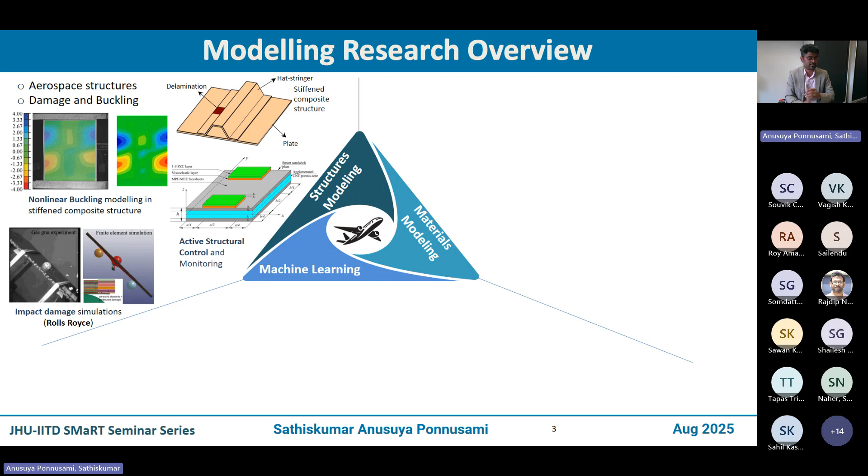With that, a quick overview of what we do. For the last almost 7 years I've been an academic, and my research is primarily centered around modeling tools for aerospace structures and materials problems. There are three different pillars in this. In the first pillar, we primarily develop nonlinear modeling techniques to capture some highly intricate nonlinear mechanisms such as damage and buckling and their interactions in aerospace composite structures. We also develop techniques to control structures, either for morphing or for controlling vibrations using smart materials embedded into the structure, and high fidelity tools to capture impact-induced damage in aerospace composite structures, primarily in collaboration with Rolls-Royce.

Moving on to the second pillar, it's all about modeling materials in the context of multiphysics and multiscale. Here we develop comprehensive modeling tools for novel material systems, for example self-healing materials, but also other classes such as multifunctional composites for electromagnetics or stealth, and in collaboration with Airbus, a range of material systems that incorporate multifunctionality such as harvesting and storing energy on top of being the primary load bearer in an aircraft structure.

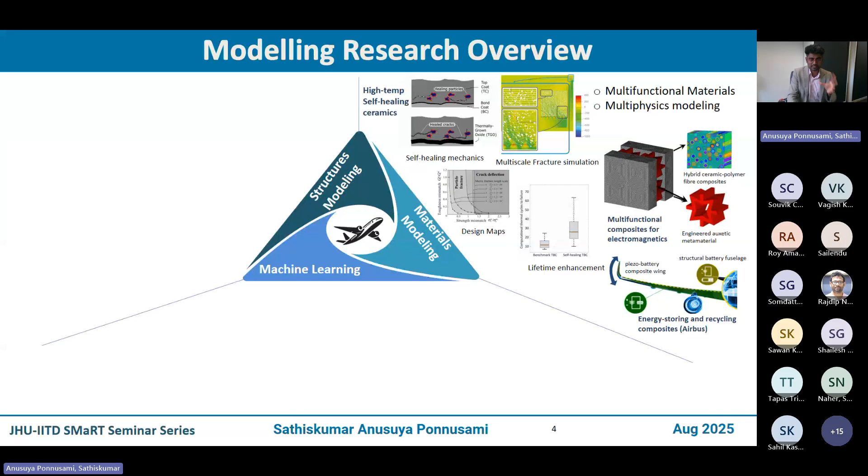Now the third, cross-cutting pillar is probably the most relevant for today's talk: machine learning. It's a cross-cutting pillar, and within it we primarily work on two different directions.

The first being utilizing machine learning architectures for constitutive modeling across a range of material systems, but also utilizing generative deep learning for design of engineering systems, both materials, but also more complex engineering systems.

So what you see here is some examples, an end-to-end pipeline that actually takes in microstructure as input and provides the range of material properties of interest for design from a materials context.

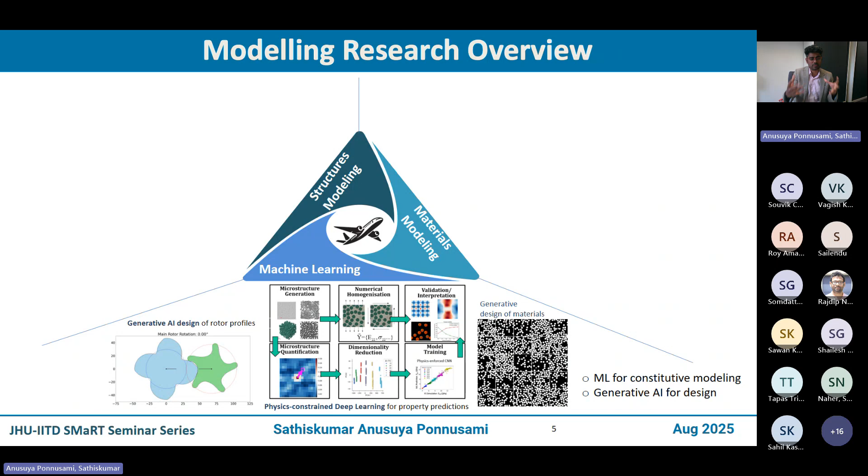We also extensively use generative deep learning, primarily GANs and diffusion models, to come up with novel designs of rotor profiles and material systems. So that pretty much summarizes the landscape of my research team over the last 7 years.

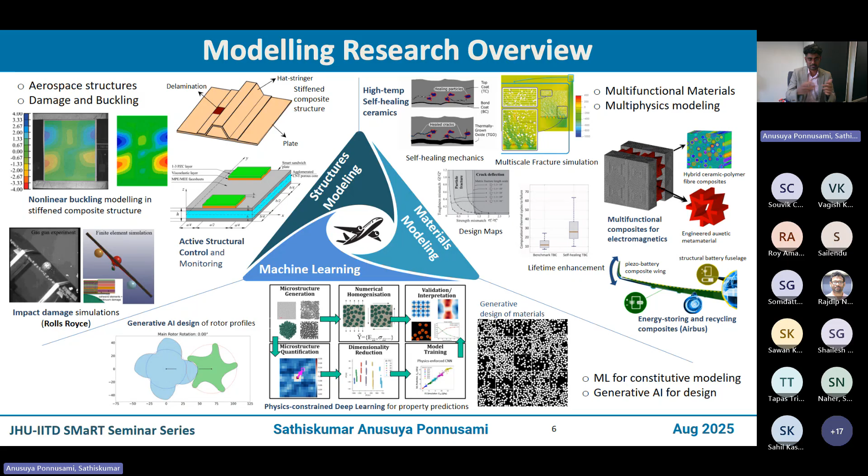And this work is done not by me, but by my students, my postdocs, but also my collaborators across the world. So with that acknowledgement, let me quickly focus on the third pillar, which is machine learning for prediction and design.

Within that, the first direction is predictive machine learning, in which what you saw in the previous slide is an end-to-end pipeline that can handle arbitrary microstructures to provide a range of material properties, multiphysics material properties of interest.

And these are some of the results, which is also a key part of today's talk.

But also along the second direction within this pillar is how can we use generative deep learning? I'm not talking about large language models here, but more of designing based on vectorized images and time series based image evolution. That is what I talk about here.

And one example is what you see here is the training process of a Bayesian generative adversarial network, which can come up with or generate realistic rotor profiles for compressor systems.

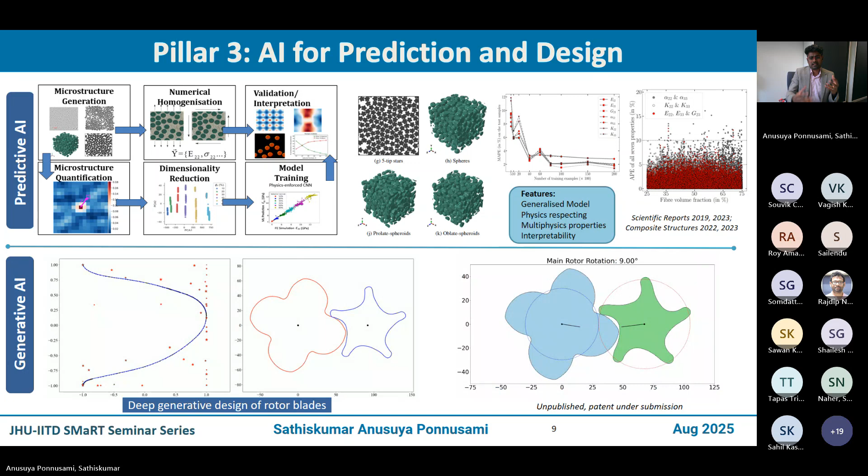This is an industrial consortium funded project here. So what we really achieved here is a valid, manufacturable rotor profile that is not designable using existing classes of techniques.

In other words, a lot of hybridization has gone into it. And as a result, we were able to observe certain profile designs which performed better than the existing benchmarks.

So you may call that hallucination, but you may also put it in a different context: can you hybridize different classes of existing designs to come up with a novel design, which is not otherwise possible using existing techniques?

So the second phase of the project is being funded now, and it's going to start in a few days in September.

But I've been working on this particular broad range of topics for a range of material systems for over 6 years. My fundamental questions are these.

Where does machine learning add value? I think that is really, really important.

And then once we identify that, how do we design the problem and how do we choose the surrogate? Surrogate is a very critical word here, and its meaning should be properly understood.

And the fourth question is, what is really the way forward to integrate machine learning into mechanics problems, whether it is modeling, simulation, or prediction? How are we going to integrate machine learning architectures towards mechanics problems?

I think if one is able to answer comfortably and convincingly all these questions, then it would mean he or she has a nice problem to handle using machine learning.

So with that, what I'm going to do for the next 40 minutes or so is briefly touch upon 4 different problems which we have worked on for the last 4 or 5 years. And in the end, I'd like to critique which problem is more useful than the other.

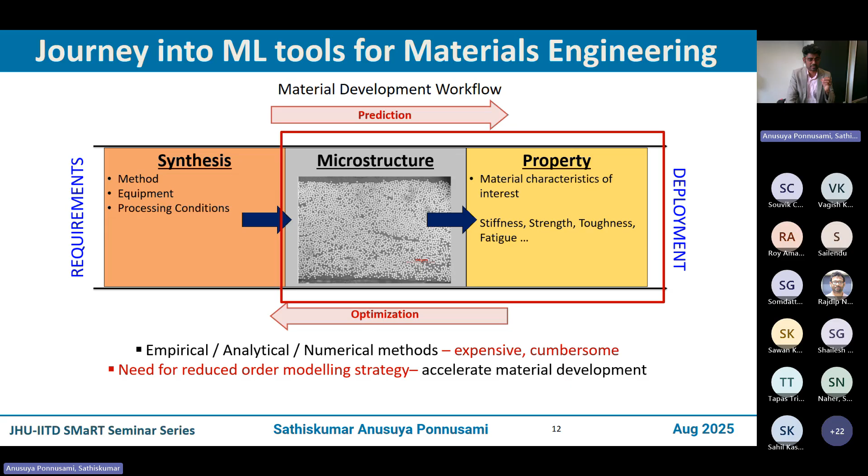So that is the single line objective of this particular piece of work, in which the overall methodology is what you see here. There is a typical workflow that you will find in any materials prediction framework using machine learning. You have certain microstructures of materials, and then you obtain the properties of the microstructures. There are two different ways to go about it. One is conduct experiments, get the properties, or conduct numerical experiments, get the properties. And that is the most time-consuming aspect of generating the data set.

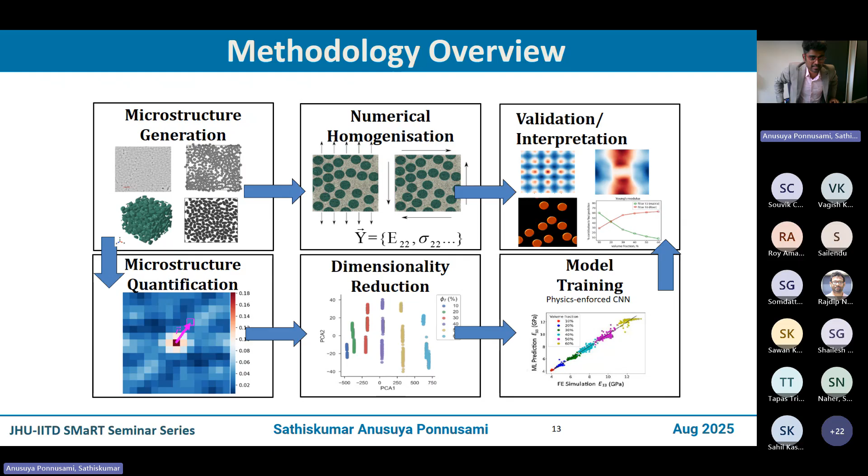But even then, can you still make a machine learning model that is still useful, despite all the computational costs associated with the data generation? And if you are able to say yes, then that's a success. And of course, there are other aspects that you have, in terms of if you do not use deep learning techniques, you may have to do quantifying the microstructure, do some dimensionality reduction, and then develop or train machine learning models to predict, followed by some sort of validation and interpretation of your models or the prediction from your models.

Okay, so this slide is quite important here, which answers some of the questions that I raised before. And the title clearly says, how do we move towards a more generalized, physics-respecting machine learning model? To put it simply, the objective is simple. You are given any arbitrary microstructure of a composite material.

I'm not saying that here you're feeding in a microstructure of a carbon fiber composite. No, you are given any microstructure of any composite. For example, it can be glass fiber reinforced in epoxy matrix, or it can be a carbon fiber, or any other possible fiber matrix combination. You feed it into the pre-trained model, it gives you the properties. And here by properties, I mean not just the mechanical properties, but a bit more, which you will see later.

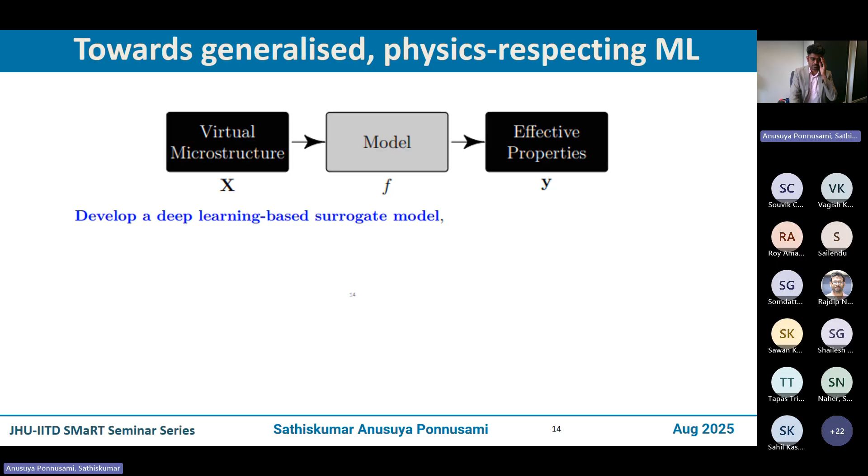So some of the ingredients of the model that we developed are shown here. First one is it considers end-to-end practical range of fiber volume fractions, meaning the amount of fibers that you have in the system, and the different combinations of fiber matrix material systems. And that's quite key towards achieving a generalized model here. And it obviously accounts for arbitrary fiber shapes and distributions, which is quite important to enable the design exploration of this particular space.

You don't just predict the Young's modulus or Poisson's ratio. You predict a whole range of properties of interest, starting from Young's modulus, but also yield strength, thermal expansion coefficient, and thermal conductivity. This is because in demanding applications like aerospace structures, you often do not just need one effective property such as strength or stiffness—you need a whole lot of properties.

In some cases the material might be smarter, so you may look into piezoelectric properties, or stealth properties related to electromagnetic absorption. In that sense, you need the prediction space to be as wide as possible in terms of the properties of interest, and that is something we accounted for in this framework.

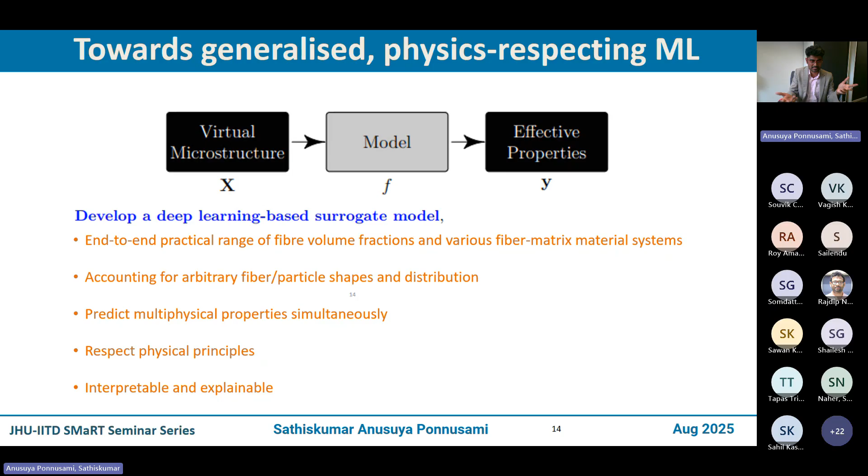The following question is addressed: we are generating microstructures virtually, but does it correlate with reality? That validation is done using spatial metrics of these microstructures.

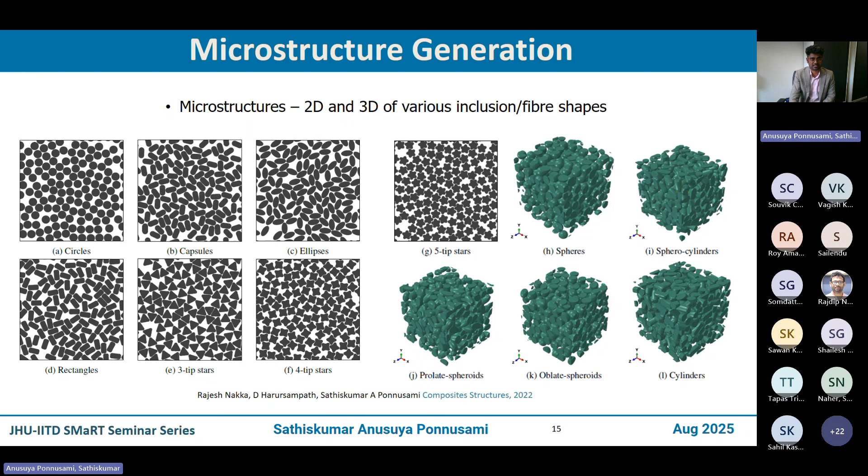Then comes the properties of interest and how we design the dataset. This is a critical step before getting into complex machine learning architectures. What's really important is how you define the data, how you design your experiments—virtual experiments in this case. That's the snapshot of this particular slide.

We identified the practical range of properties and the input parameters in terms of the volume fraction and the fiber-matrix combinations. That's what I mean.

For example, let me open the pointer options. If you look into this number here, the ratio of the fiber modulus to the matrix modulus, it goes from 2 to 200. That basically covers the entire practical range one would want to design. So that's what I mean—you make your design space as large as possible.

That doesn't mean you're cranking up the machine and generating millions of datasets—no, that's not the point. The point is you have a wide design space but still sample effectively, so that you cover the range and choose a model such that it can interpolate well and also extrapolate to a reasonable extent outside the design space or the data space.

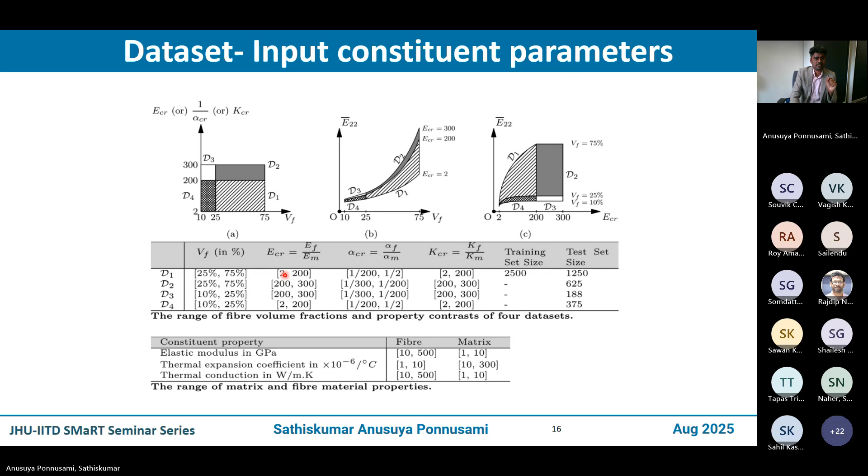These are some of the properties obtained using the so-called variational asymptotic homogenization, which many of you might not be aware of. To put it simply, what we do is create RVEs—representative volume elements—of arbitrary microstructures. Using this technique, combining variational and asymptotic principles, we pose a variational statement of this RVE. Then, by minimizing the strain energy density of this problem in terms of the small parameters that exist, we arrive at the Euler-Lagrange equation. From there, you can get the effective homogenized strain energy, which results in the bunch of properties of your interest—the homogeneous properties.

I'm aware I'm going faster in explaining this particular tool, but the reason is this tool is already established—we've published papers you can refer to. It's called variational asymptotic homogenization, originally developed by Professor Dewey Hodges and Professor Wenbin Yu from Georgia Tech, and also from our group at IISc, led by Professor Harursampath.

So this is how the dataset looks like—the Young's modulus, the thermal expansion coefficient, and the thermal conductivity.

But also what is not shown here is other sets of properties, such as yield strength, and also electromagnetic or piezoelectric properties. All that data is available, but it's not shown here for brevity.

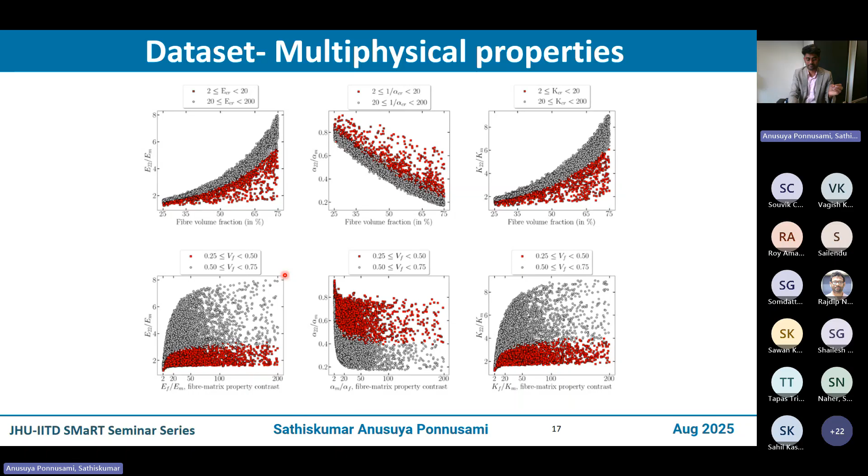Great. The next key thing we do, which is a very simple step but quite useful, is you need to make your machine learning model as objective as possible. In other words, if you show your model a given microstructure, however you rotate or flip it, it's still the same, right?

So this is one way of augmenting the data, but also making the model more objective for these rotations or reflections. The next key step is, as I said, we have about 18,000 microstructures, not millions, but still we were able to populate the entire design space, covering arbitrary combinations of fiber matrices and arbitrary multiphysical properties. Some of them are shown here.

So what we do as a key step is, in the microstructure, which is binary, a two-phase microstructure, you embed the material information, or encode the material information as arrays. So that during the training, these arrays are passed in as input properties.

So once you know the properties of the individual phases, you basically have different layers in your microstructures. One is the microstructure image, but then there are multiple other layers behind, which are the material properties encoded in arrays. That is what you basically see here.

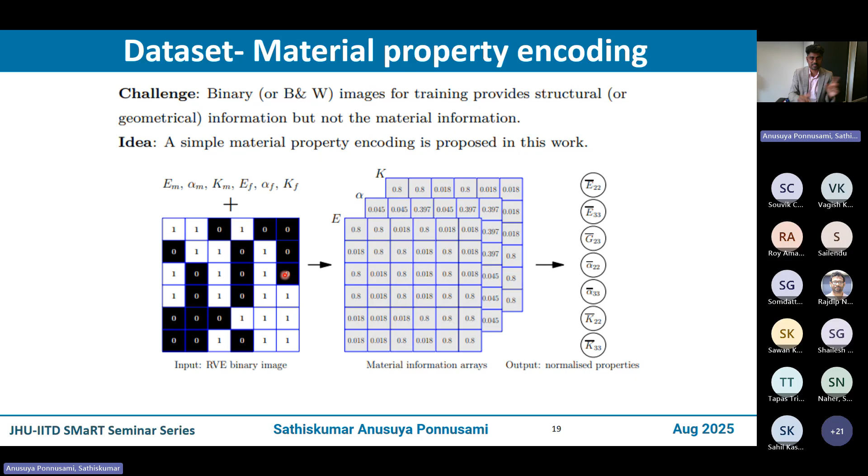So with that, now what we have is material encoded microstructure and the resulting effective properties obtained in a computationally efficient manner using the technique I described before. Now we go on, the data set is ready.

Now we go into CNN. In this part, one can think of a whole lot of architectures, but the objective here is we choose one of the most popular CNN architectures, inspired from VGGNet type architectures, quite popular in computer vision applications. So we used that and adapted it to our problem here.

One may argue other classes of architectures can also be quite useful here. For example, one of our organizers is quite active in working on neural operators. In fact, we have a project going on utilizing neural operators for these kinds of problems. But the point here is not really to justify a particular type of architecture, but to show how the entire pipeline should be constructed such that you achieve the goal of having a more generalized model to predict a wide range of properties of interest.

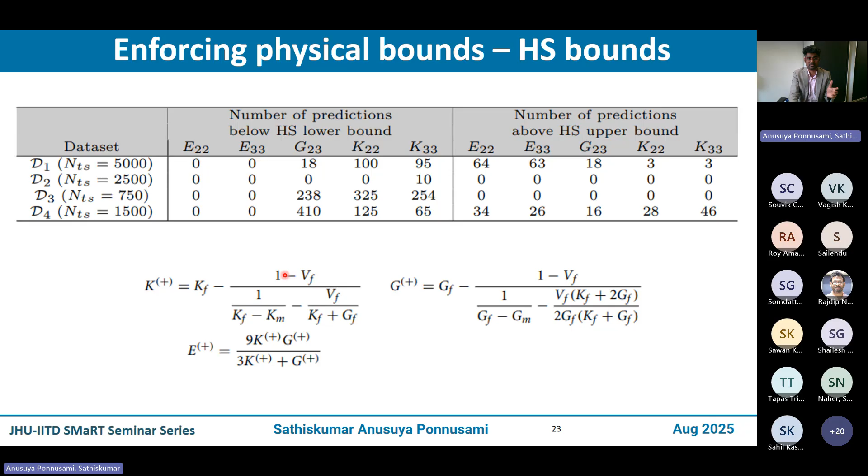Once you have some sort of physics that is infused, which is quite important in homogenization, these bounds should be met strictly. Some of the results are what you see here in terms of the error metric, absolute percentage error of different properties. Without getting into the details, what you really see here is for the vast majority of the samples, the error is within 5 to 7%.

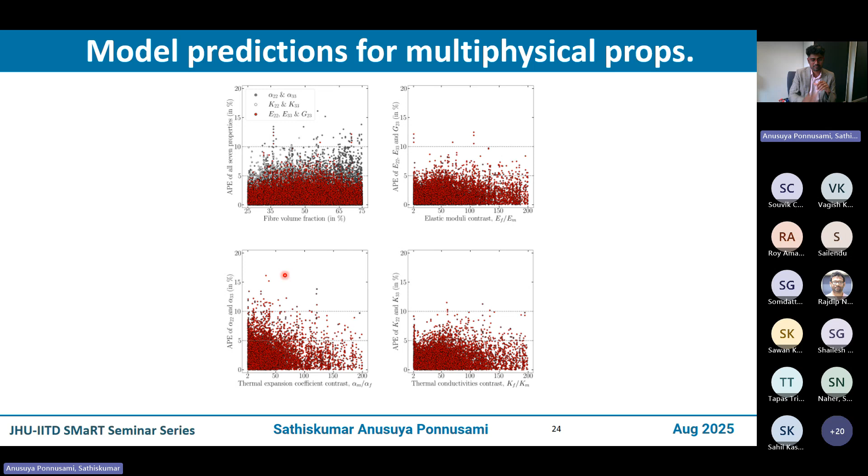What is really important is this error—even if you go to the highest error of about 10%—has to be understood in the context of the generality that the model provides. The model is not for one particular fiber matrix combination. It is for an arbitrary fiber matrix combination and for arbitrary material properties, and that is quite important here. So that is what you see in terms of the results.

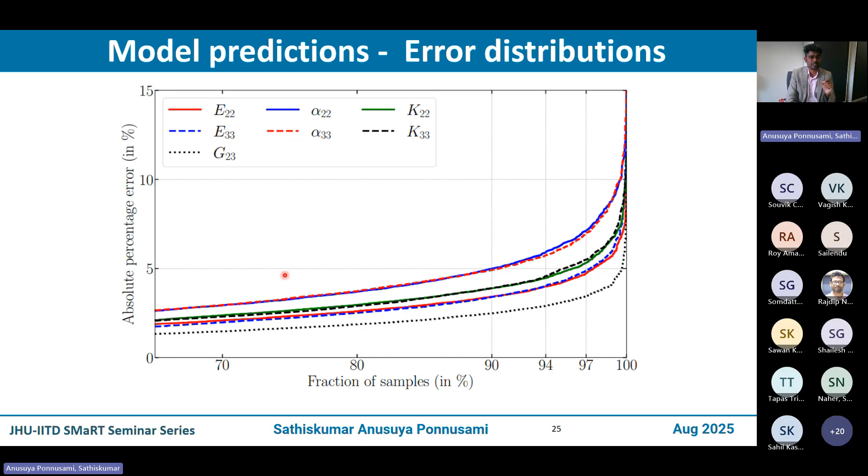Now, obviously, we have a design space for the dataset generation. But what if you extrapolate or force the model to predict out of the bounds? We have three different datasets, D2, D3, and D4, which are in widely extrapolated domains, not physically needed for practical purposes because engineering design doesn't go into that space. Nonetheless, we want to check how well the model can extrapolate. The disclaimer is we are not extrapolating significantly out of the domain, but we still go reasonably enough out of the design bounds for the data.

What we really observed is, again, more than 90% of the samples in the extrapolated regions still provided a reasonable prediction for the properties, for all sorts of properties you can think of, both mechanical and thermomechanical. Which is good news, because the model is now not only generalized for arbitrary material properties and combinations, but also can extrapolate well in the neighbor domains outside its training space.

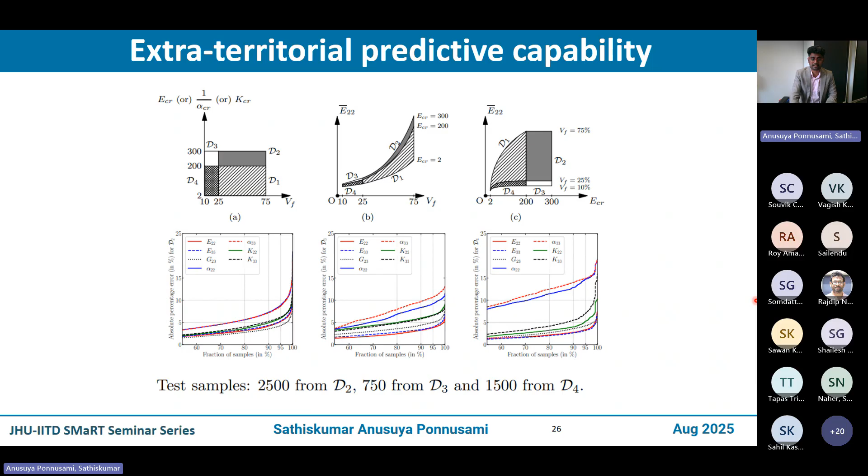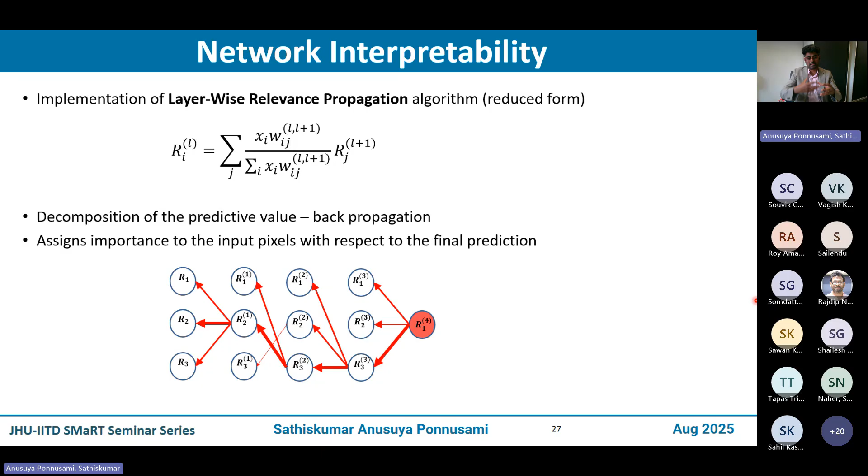Now comes the other key ingredient in the framework: do I understand how the model actually learns? How do you do it? There are different approaches available in the literature. Here we used a very simple layer-wise relevance propagation algorithm, in which, in layman's terms, you dig into the architecture of your CNN and see how the features are extracted by the model.

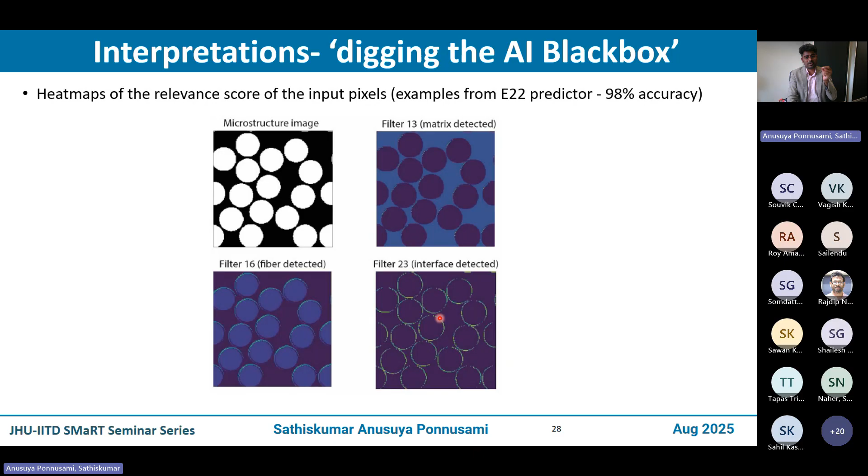But we go one step further to see how these features are considered important for the predictions. We took two different samples from two different extremes of volume fractions, and what you see is this particular contribution of those features. You see two main peaks, and the peaks are reversed in the bottom two figures. The reason is in one case the volume fraction is high, and on the left side the volume fraction is lower.

Accordingly, if you focus on this particular graph, what you see is two peaks: one corresponds to filter 13, which is the matrix phase—it identified the matrix phase completely—and the other filter identified the fiber phase. Those are peaked, which means the model considers these two features to be important in the predictions.

It reverses here because the number of fibers is more, so you see the fibers peaking here more than the matrix. You also see many more little blips, which means there are other features the model extracted, but they are not considered really important or significant for the predictions.

But if you want to extrapolate this for complex microstructures, such as ones with pre-existing defects or flaws, those features might assume importance, and that is where you might see potential third and fourth peaks that could impact the predictions.

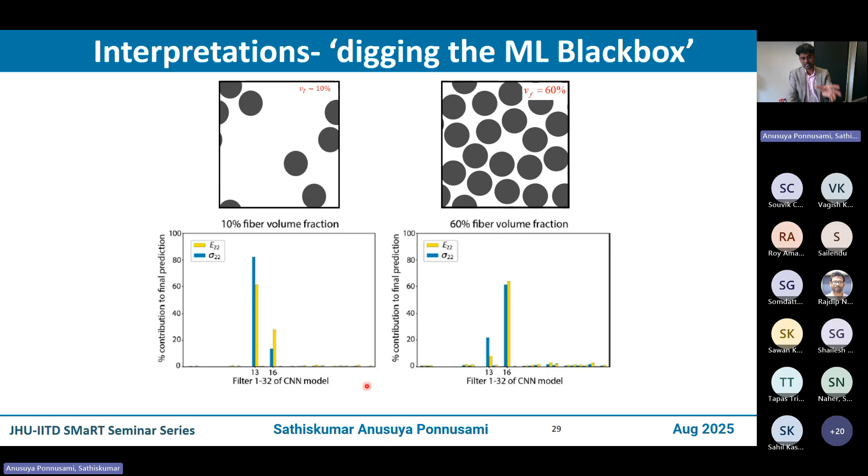So as a third step within this interpretation process, we also looked into whether we can get some insights into the physical model that it is trying to learn, and that is what the result here shows.

Which means the physics is kind of learned during this process, and that is revealed through this interpretation.

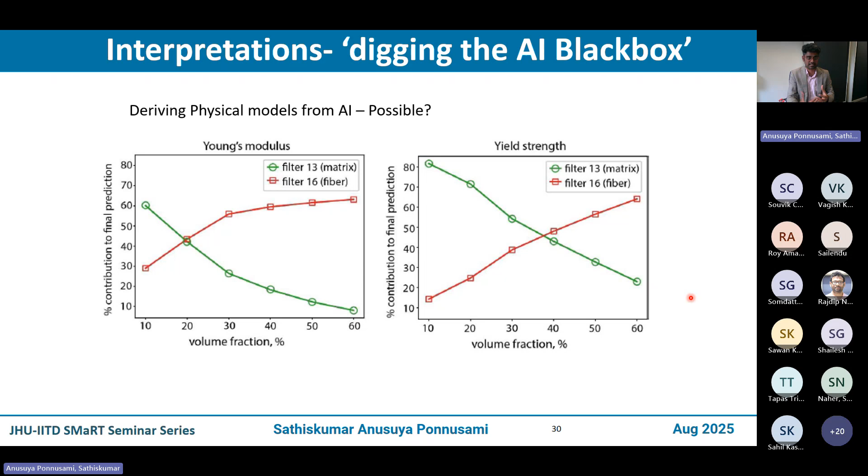We were able to derive the physical models which the deep learning architecture is trying to learn in the first hand. Okay, great. We also did a little work taking a realistic experimental microstructure.

This is an optical micrograph of a carbon fiber reinforced composite. So what you do is clean it up, take different cropped images of those so that you can feed them in.

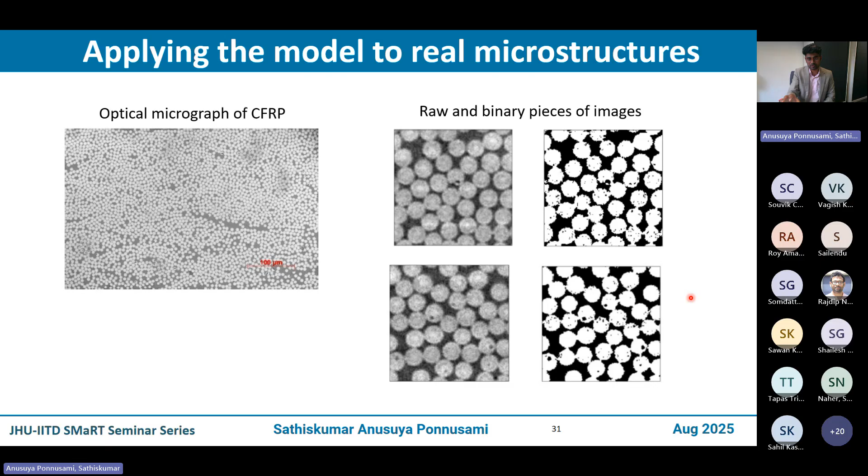The only preprocessing step is converting them to binary images, and you can see the image quality is quite poor, but we feed it into the model and see how it predicts, and what we observed is that it predicts reasonably well.

If you look into the non-dimensionalized Young's modulus, the experimental value is 3.63, whereas the prediction by the CNN is about 3.88, which, given the poor quality of the image fed in, is quite reasonable in my opinion.

So that basically tells you the whole story in terms of how you design the data such that you cover the wide design space without necessarily needing millions of data points, while also infusing physics where possible, using computationally efficient techniques to generate data, and making sure your model is extrapolatable and interpretable. That is what you basically saw in the whole process.

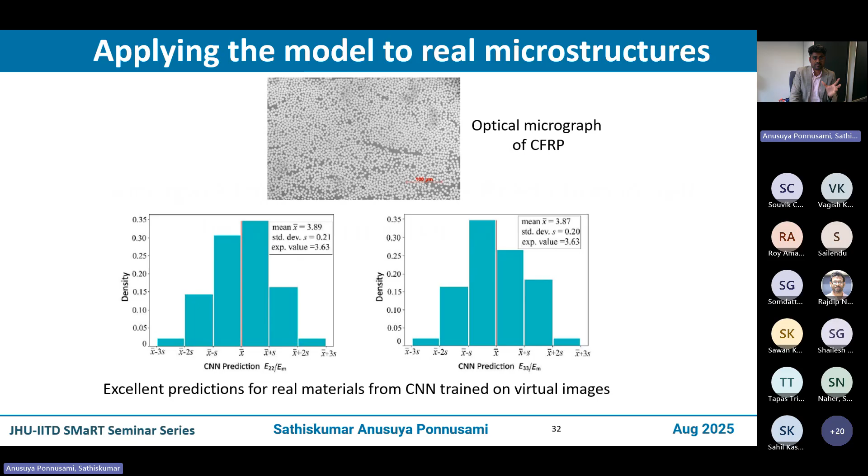Okay, so now we go on to the second example, which is a completely different problem.

Here the objective is a surrogate model developed purely for uncertainty quantification on the so-called lifetime of a novel material system. The material system is self-healing thermal barrier coatings, typically found in aircraft engines, in the turbine blades.

But forgetting about the details, what happens in such coated blades is that micro cracks form for multiple reasons. One is that an aircraft takes off and lands, which means micro cracks develop due to thermal expansion and contraction. Here we are talking about combinations of metals and ceramics, which naturally expand and contract differently, so micro cracks grow.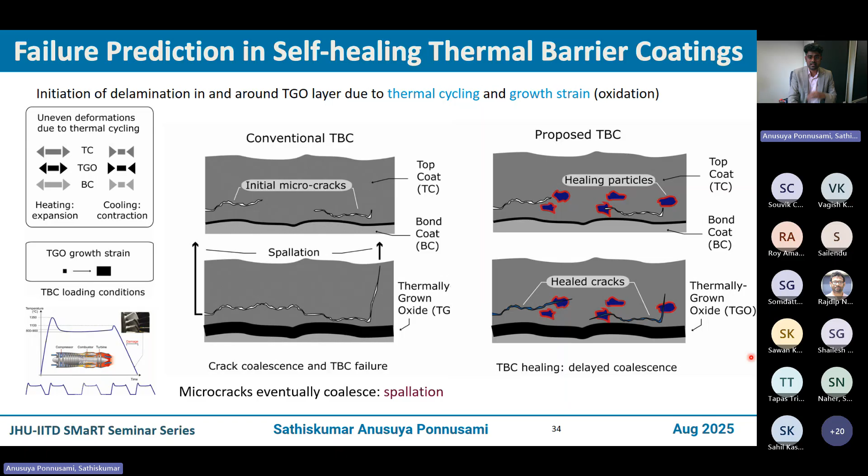And hence extend the lifetime. But the problem is this is a highly complex material structure. You have multiple physics going on, a complex microstructure, and complex physics such as cracking, healing, and material growth. So a lot of physics going on here. So how do you design such a system?

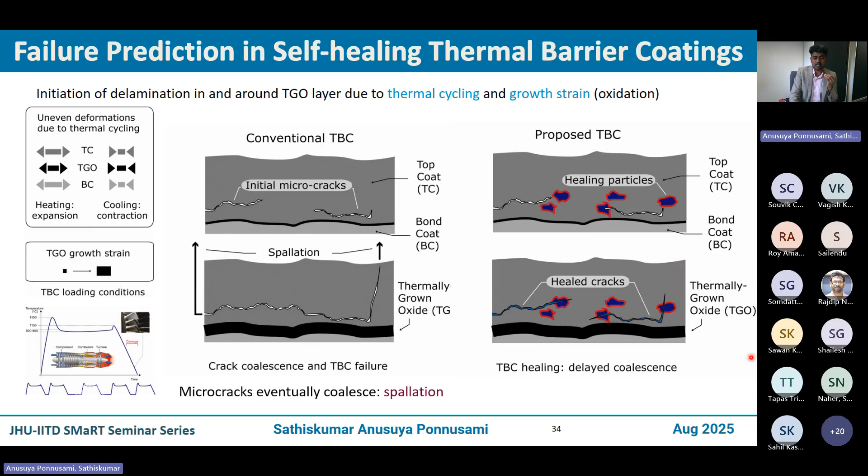That is where computational tools are quite handy. So what we really did here is break down the complexity and establish a modeling framework. From the concept, we want to get a design tool, a computational design tool, and a lot of ingredients come in - I'm not going to get into the details - but that tells you the complexity of the problem, whether it's the microstructure with pores and layered structures, or crack healing, which is a physics in itself, the thermally grown oxide layer, which is physics altogether in itself, but also multiple other interactions in this complex system.

But the objective here is we want a modeling tool that can predict the lifetime so that the material scientist can use that as a design tool to choose the design parameters of their material system.

To put it simply, say you have a self-healing system. How do you choose the particle size? How many particles do you need? Where should the particles be placed? What should be the size of the particles? What should be the spacing? These are all questions that are quite difficult to answer through experiments. Otherwise, you'll keep doing experiments for years without reaching a conclusion. So that is why modeling tools are useful.

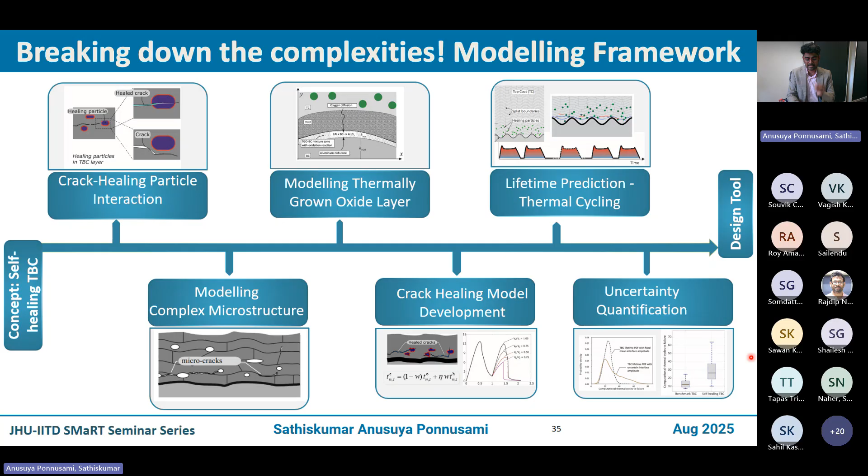Without getting into the details, I'm directly jumping to the result. There's one snapshot of the fracture simulation we did, incorporating all the physics you saw in the previous problem.

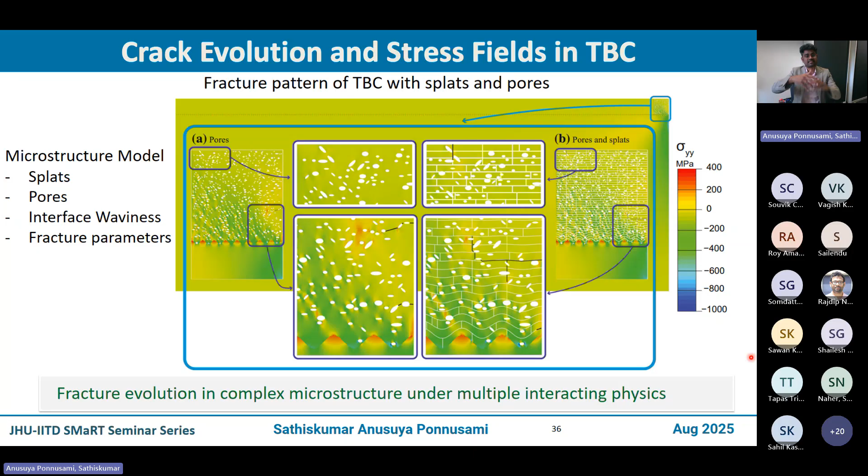Again, without getting into the details, what we really get out of that is we can predict how many cycles you need to completely fracture the system, the coating. So that is your lifetime. For example, here without healing particles, the lifetime is 13 cycles, which in reality can correspond to 1,300 cycles - we did it in an accelerated manner.

And if you put healing particles, the number of cycles is quite high, so you clearly see there is a lifetime extension. But the problem is, even though you know that due to healing the lifetime will extend, you cannot easily control the ingredients in it, the design parameters. It's quite difficult to control. So you need to know which design parameters are quite influential in affecting the lifetime, so that the material scientist can design those parameters to optimize the system.

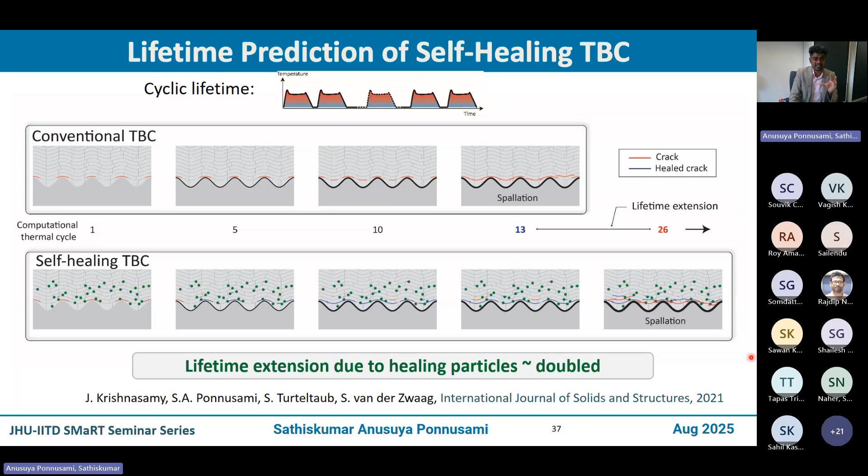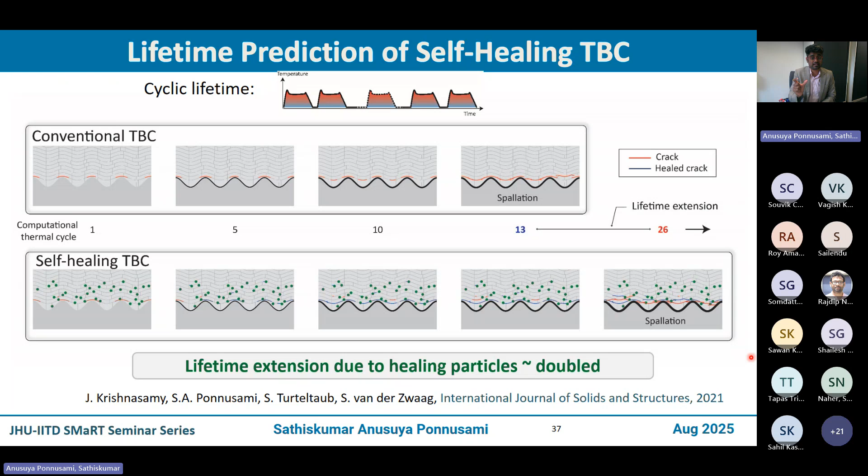So what we really did here is we did not build a surrogate model for the purpose of predictions - that's really important - but rather we built a surrogate model for the purpose of quantifying the sensitivity of different design parameters of interest to the material scientist, and we assess those so that you can give useful guidelines to the scientist to develop these systems. That's quite different from what typically machine learning models are used for.

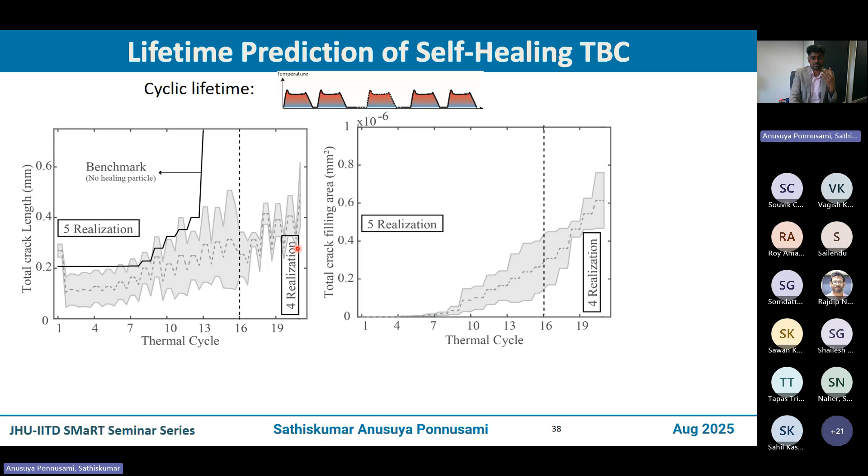But then there is a large scatter. So how do you handle that scatter? If you want to really do a Monte Carlo simulation, it's quite impossible because each simulation took 60 hours in the high performance computing cluster, and we are talking about thousands of simulations, which we cannot really afford to do.

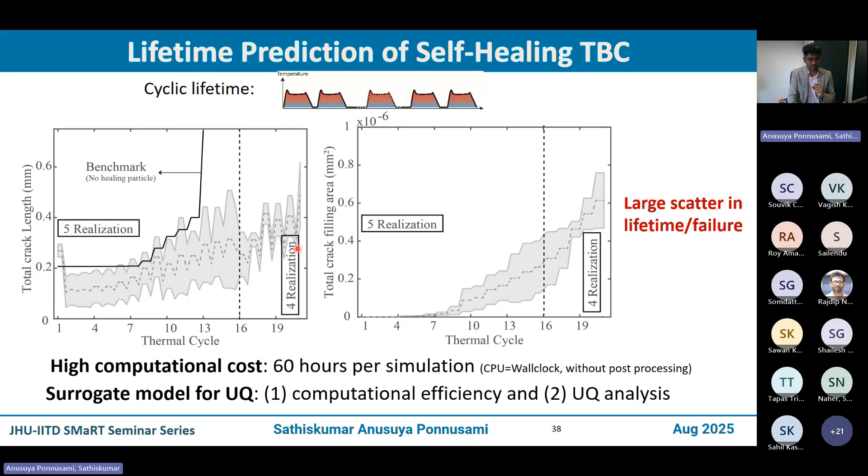So that is where we build a surrogate model purely for computational efficiency and quantifying the uncertainties of the parameters. When I say surrogate model here, we are not bringing in machine learning. We are purely talking about a polynomial chaos expansion, or PCE based surrogate, in which we chose 5 different

design variables of interest, and then we pass it on to our complex simulators after sampling through the Latin hypercube sampling technique. And then you train the PCE surrogate for the lifetime.

And then you basically interrogate the surrogate for the small design space that you are really interested in, and look at the sensitivity of the different parameters. Because that is the whole purpose of developing the surrogate, not really to have this as a design tool to explore the whole design space.

Because material scientists know they have this small design region which they are interested in, and that is where we want to show which parameter is more sensitive to the design or to the lifetime.

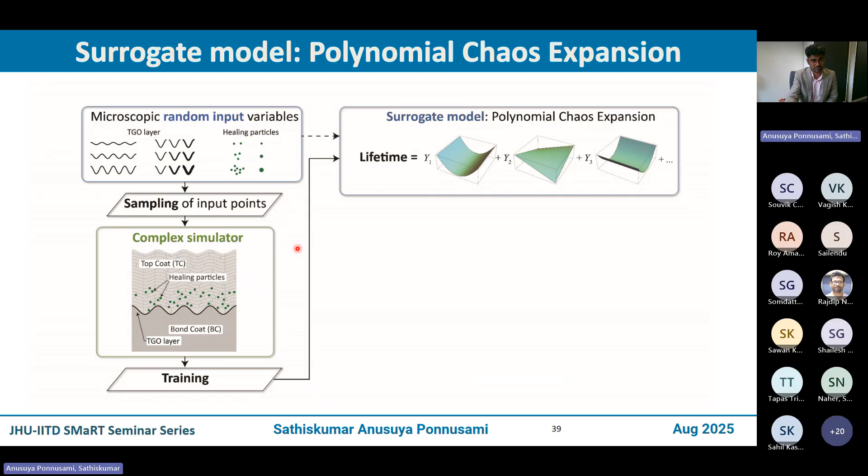Okay, let us get into the results without getting into the details. So these are the quantification of the sensitivity of different parameters, or in other words, the results of the PCE surrogate model for 5 different parameters is what you see here.

But by looking at it, this was a useful result for material scientists. Why? Because you have 5 parameters that they think is really important. But then by looking at it, you see only the top 2 parameters are quite sensitive to the lifetime, whereas the bottom 3 are not as sensitive as the top 2.

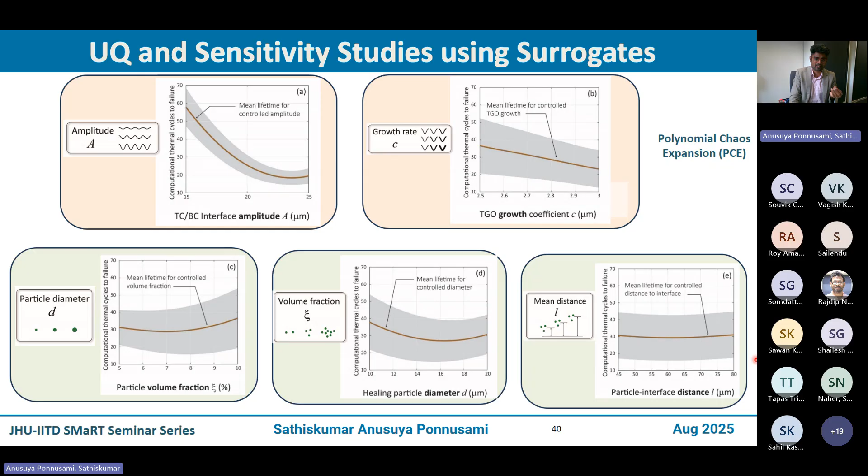And that in itself is a useful result that computational scientists can feed to the material scientist, practically useful and valuable results. And of course you can look into the Sobol indices for the first order and the total

sensitivity index of all the 5 parameters, which is also reflected here. What I just told in the previous slide is also reflected here. The interface amplitude and the TGO growth coefficient are the primary contributors for the lifetime, which means the other 3 parameters, which are to do with the healing particles, are not that important for the self-healing system to be optimal,

which is a useful result because material scientists do not have to worry about whether the particle diameter should be exactly 20 microns or is it okay if we have 16 microns or 24 microns. The answer is it doesn't matter. So that's the level of confidence that you can get.

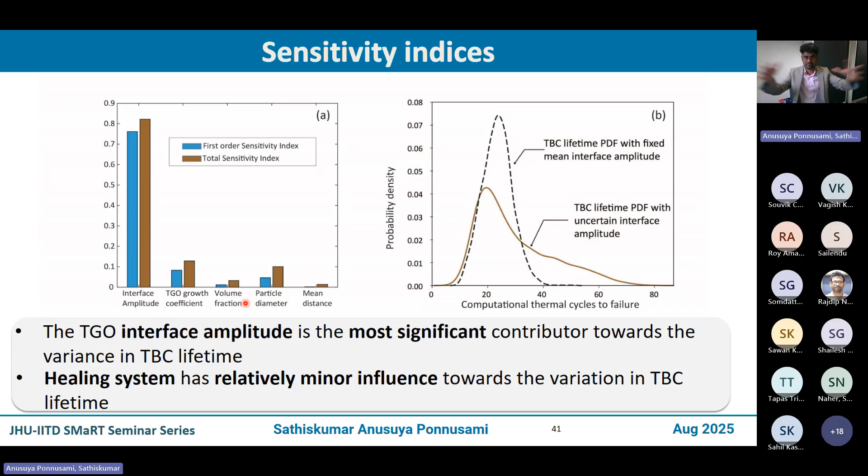On the right, you have the PDF function for the lifetime. Of course, the PDF gets more broader when you have this uncertainty included.

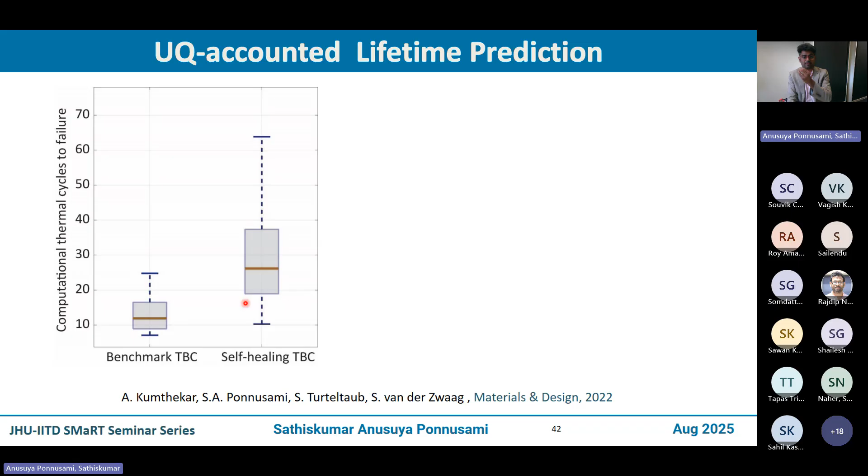So to quickly summarize here, you clearly see self-healing improves the lifetime, but with a large scatter. And that is where these surrogate models can come in handy to quantify that uncertainty and give some useful insights to the material scientist. Okay, so that's the second example that we saw.

Follow up to the second example. What we really did is a toy exercise. So we used PCE as a surrogate, but then why not use the same data set and fit or train a Gaussian process regression? What we really observed is you basically get the same result. So then the question is, do we need to complicate an architecture?

Because if we are clear about the requirements, a very simple surrogate using a simple architecture is more than sufficient. For example, here, use of a CNN is an overkill for sure, right? Because that is not really the purpose here. It doesn't really fit here. Whereas a PCE fits very well for this particular problem.

Whereas PCE might not fit for the problem that I had before, in which you have 18,000 microstructures of arbitrary material combinations that you can imagine. So that is where deep learning architectures are more applicable.

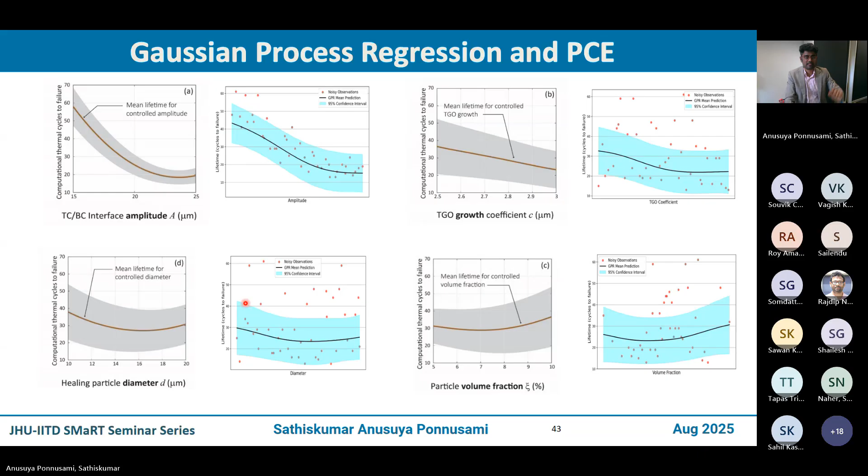Okay, now moving on to the third problem. I'm looking into the time. I see I have maybe, I'll try to finish in 5-10 minutes and then go to the final slide.

So this is the third problem. It's what we really did. And I think this particular problem is a useful problem. The reason why is this.

Without getting into the details, some of you might know what crystal plasticity is. If you do not know, classical plasticity such as von Mises or Tresca theories, they are phenomenological models that are applied to macro scale.

So classical plasticity models, unlike crystal plasticity, do not resolve grain-level details, whereas crystal plasticity looks into slip systems and the activation of slip systems, how slip systems grow and evolve. It's a more high-fidelity way of modeling plastic deformation in metallic materials.

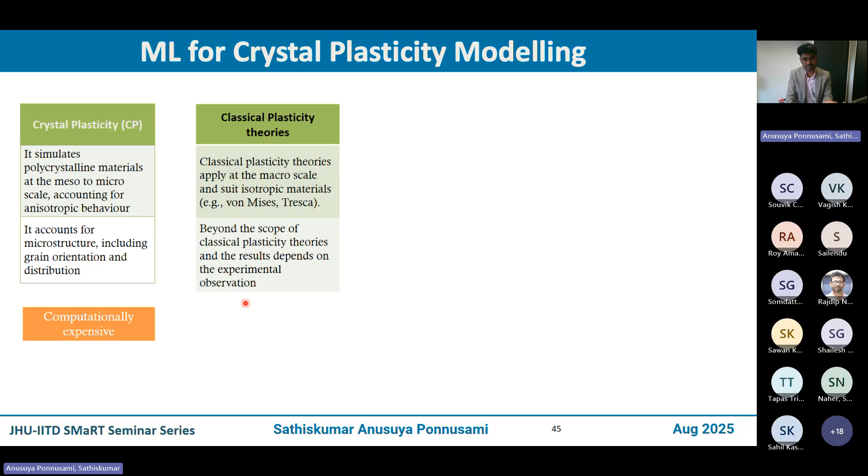But the point is these models, though really high fidelity, are computationally expensive as opposed to classical plasticity theories. For example, one simulation here, thanks to my collaborator who did these simulations, took a complete week on a high performance computing cluster.

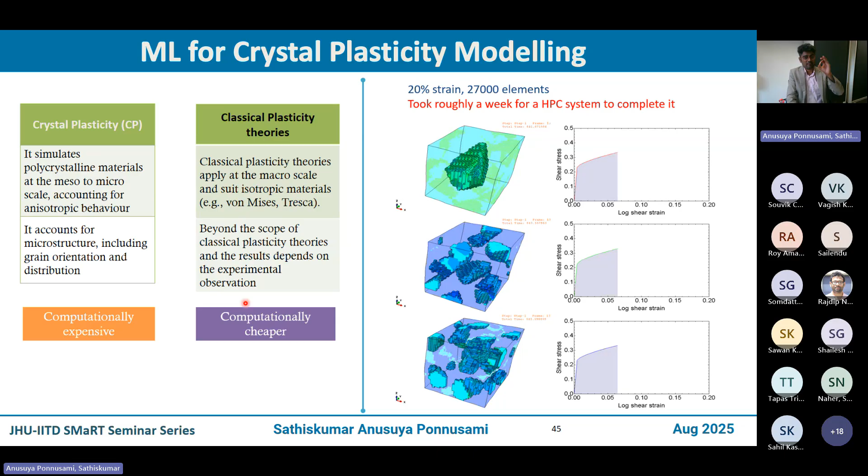When we dig deeper, here's how a crystal plasticity model works. You have state variables, like in classical plasticity, you increment your strain and then update your state variables, primarily the plastic slip and the associated plastic deformation gradient. But these crystal plasticity equations are nonlinear, which means they necessitate Newton-Raphson iteration to solve.

At each integration point in the RVE or material volume element, you need to solve the Newton-Raphson locally. But remember, you also have the global solver in the finite element loop. So you have two different nonlinear loops running, and that is quite time consuming.

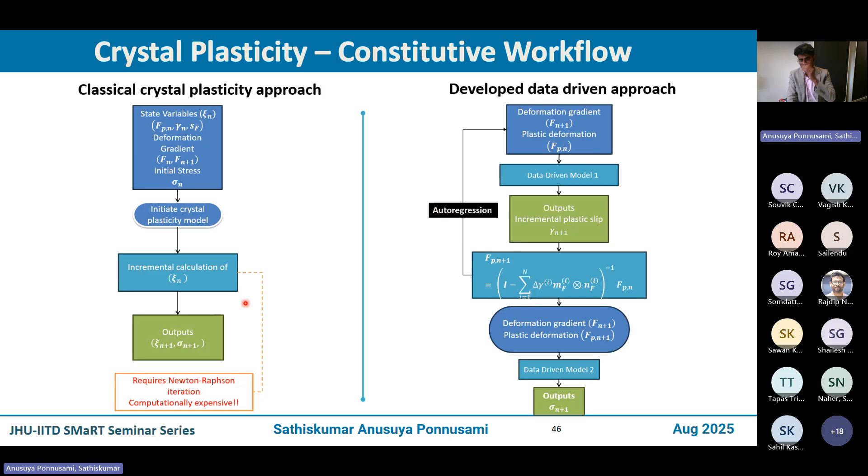So what we proposed is not to replace the whole finite element solver with a surrogate, but rather to replace this time-consuming crystal plasticity with a user material driven by a data-driven deep learning surrogate. That's basically the objective. Let me show you some results.

We explored different architectures and found that LSTM is quite appropriate for this, because these are all history-dependent deformations in plasticity. That worked well, as you can see in the metrics, and with very good accuracy we developed an LSTM-based surrogate.

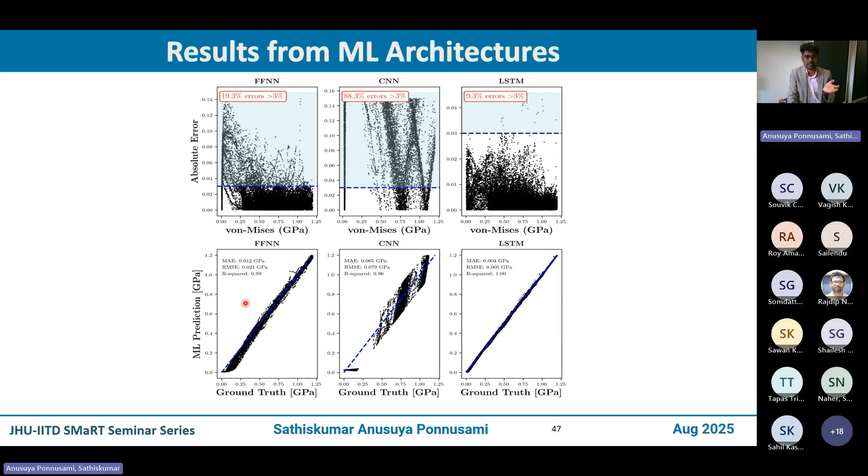You see some of the stress evolution predicted so well for simple normal loading, but also for mixed loading, which you see here, also captured well. It's not just predicting one property, it's the whole evolution of the stress-strain response for arbitrary loading conditions.

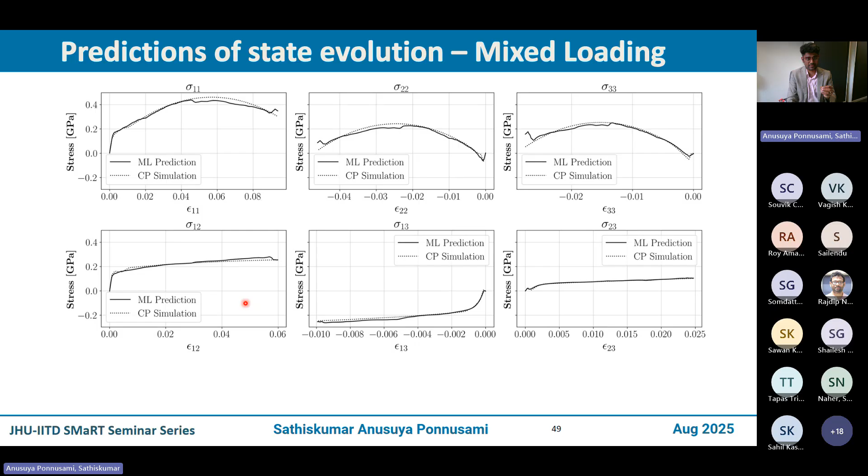You can apply crazy load steps, and still the model is able to reproduce or learn how the stress states will evolve.

This is a very good example because here we are not really replacing the solver itself. We are replacing one small part of the solver, which can be as generalized as possible, because remember, at a material point, your problem is tractable since the only variable you have is the deformation gradient.

If you cover the whole design space or data space of your deformation gradient, you're all set. And if your model is trained well on that, then you have a generalized user material or constitutive model that can replace the expensive crystal plasticity subroutine within the global finite element solver.

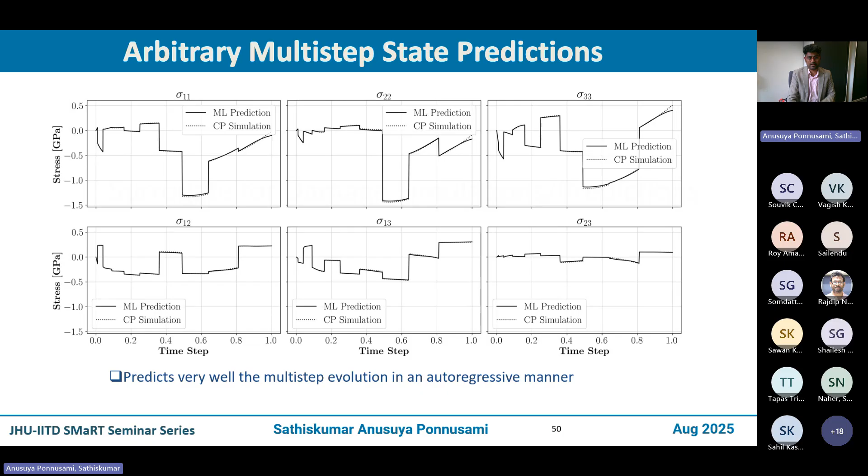Okay, now the final problem is damage simulation. Before it was plasticity, which is nonlinear physics. Damage is also another nonlinear physics. Without getting into the details, I'm going to show you two slides and jump to the conclusions.

Here, what we did is for a very simple problem, a plate with arbitrary crack topology, can we predict this? That's what you see here for one example, and the classical claim is: can you develop a surrogate to predict this evolution.

These are not just one-shot predictions, they are time-series based predictions. In other words, it can auto-regressively predict the whole evolution of the crack path throughout the process if you provide the time-based boundary conditions.

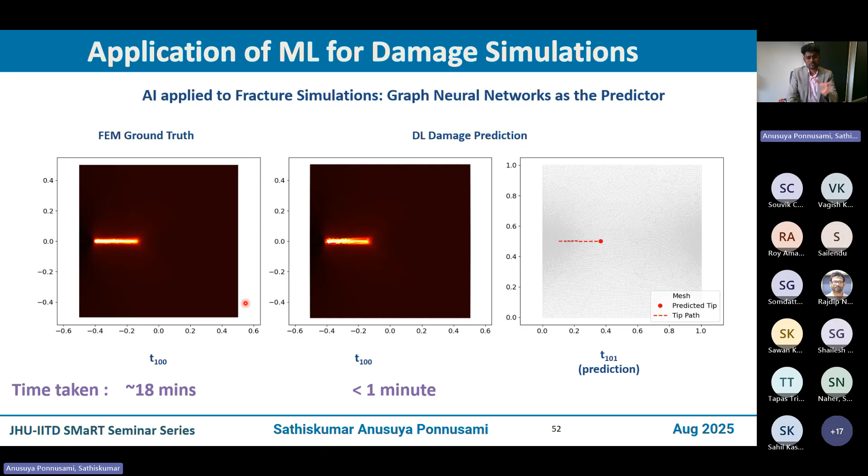So the claim is, yes, it's computationally very, very fast. But the point is, is it really useful? Of course, we expanded it for arbitrary crack topology, and it works really well, it predicts very well. But the point is, is this a useful application?

In my opinion, it is not. The answer might be obvious because what if you change the boundary condition? What if you have inclusions in here? So this model, to make it more generalized, is quite tricky.

That is where I say this type of developing surrogates for very narrow applications is not that useful, but it can be a benchmark problem to test different architectures, and that is what we basically did here.

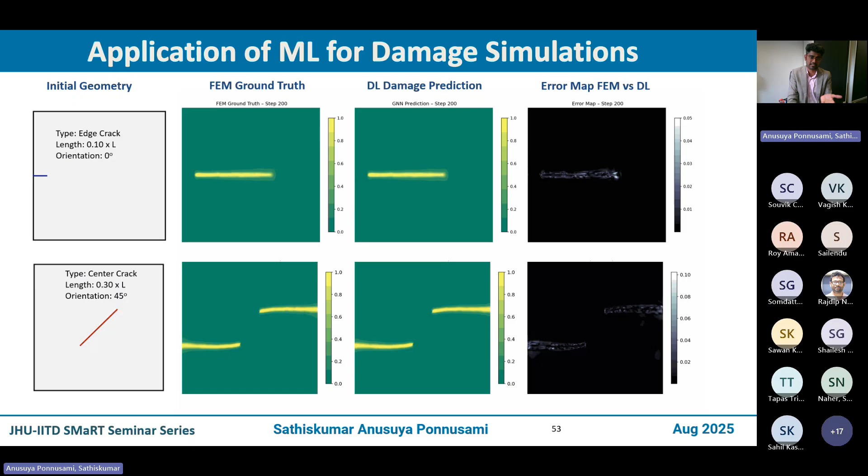So upon reflection, we discussed four applications using different architectures for different ranges of material problems, ranging from microstructure property correlations, quantifying uncertainties in self-healing systems, crystal plasticity modeling, and fracture simulation.

Which ones are more useful than the others? For example, in my opinion, the first one here is more useful. Why? Because we try to make it as generalized as possible. In other words, it is applicable to a wide range of material systems, and that is what we need. Then it becomes a design tool.

This one is also useful in its limited scope. Remember, here we build a surrogate based on PCE, not really to replace the entire physics-based multi-scale solver we've developed, which is high fidelity but time consuming. We use the surrogate in a way that resolves our purpose, which is to quantify uncertainties and the sensitivity of different design parameters of interest to the material scientist.

Crystal plasticity, I believe, is one of the very good examples of using machine learning architectures, because we are looking at a material point, not the entire domain you're trying to solve. We are not trying to replace the entire solver, but one particular part of the nonlinear solver, not the global nonlinear solver. And that can be as generalized as possible, which is what we have solved.

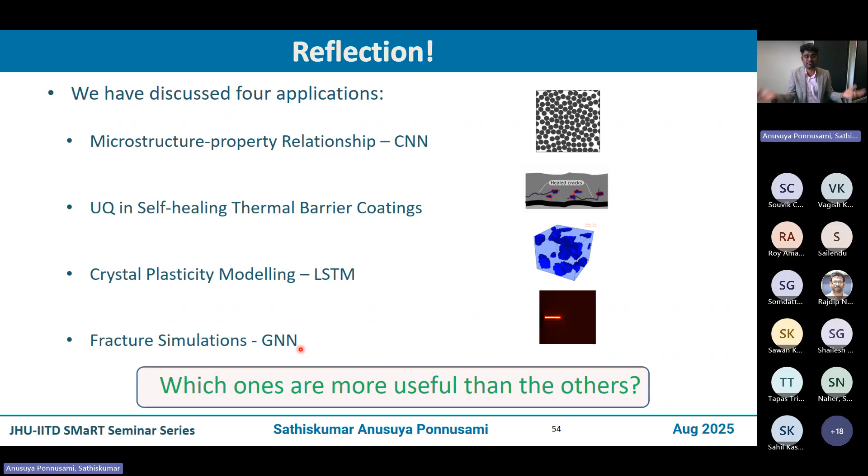So the outlook is: it's really important to identify appropriate mechanics to treat using machine learning, and also identifying the scales at which you want to deploy your machine learning is important. Some of the key things to consider are how you would make your model as generalized as possible, and where possible, how you would infuse physics.

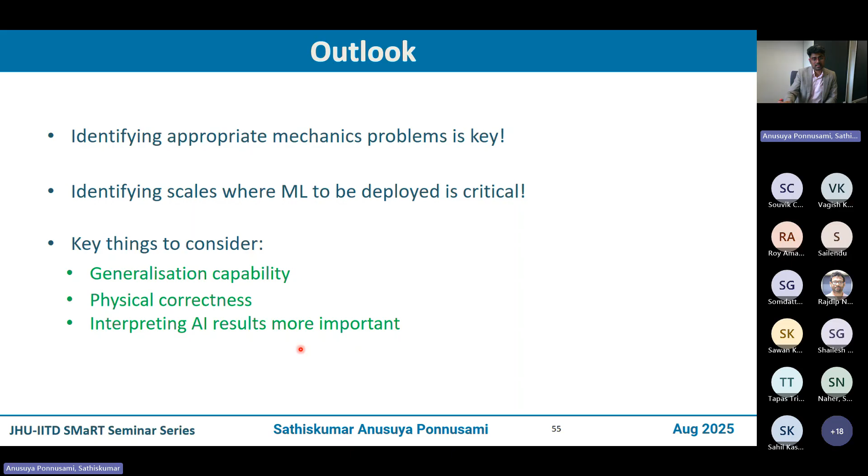So with that, I would like to thank all the contributors to this work. There are a few others not listed here, but these people are key contributors, and I also acknowledge my funders and my collaborators.